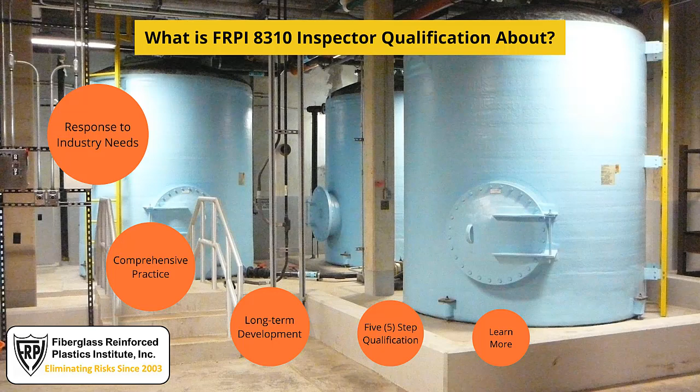Thank you for tuning in with us for What is FRPI 8310 Inspector Qualification about? The 60-second answer to this question is that the FRPI 8310 Inspector Qualification is a comprehensive practice for periodic documented fiberglass reinforced plastic, or FRP, tank inspection.

It was launched in October 2018 in response to industry needs centered around addressing laws and supporting an effective facility asset management program. This practice has undergone long-term development that drew on a balanced group of industry experts before launch and is administered by a nationally recognized and generally accepted industry organization.

It involves a well-documented, simple 5-step inspector qualification process. The process includes delivery of education by a competent third-party source, inspection procedures incorporating good engineering practices, and a means for recognizing a responsible level of FRP tank inspector expertise. There is a bit more to it than this, though. Our informative, revealing story follows.

Response to industry needs. Let's take a look at the industry needs emerging since 1990 that this inspector qualification program has been introduced to satisfy. These situations include evolving inspection laws, standard-setting precedents, FRP practice initiatives, special interest groups rallying, plus challenges and opportunities.

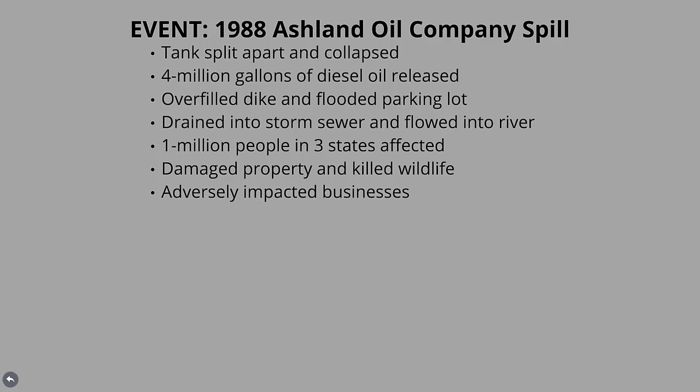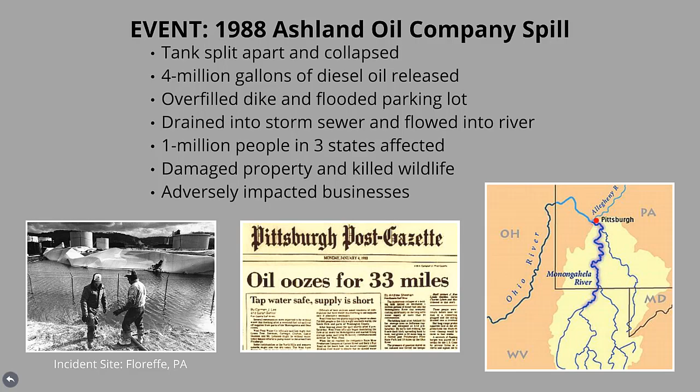In 1988, the Ashland Oil Company in Floreffe, Pennsylvania had a tank split apart and collapse, spilling 4 million gallons of diesel oil. The oil overfilled the tank containment dike, flooded the parking lot, drained into a storm sewer, and then flowed into a nearby river that carried the spill downstream for 33 miles.

In the 1990s, the EPA formed the Spill Prevention, Control, and Countermeasure, or SPCC, Task Force in response to the spill. This effort led to the regulation now known as 40 CFR Part 112, Oil Pollution Prevention. This Oil Pollution Act amended the Clean Water Act with final revision in 1994, requiring facility-specific discharge response plans.

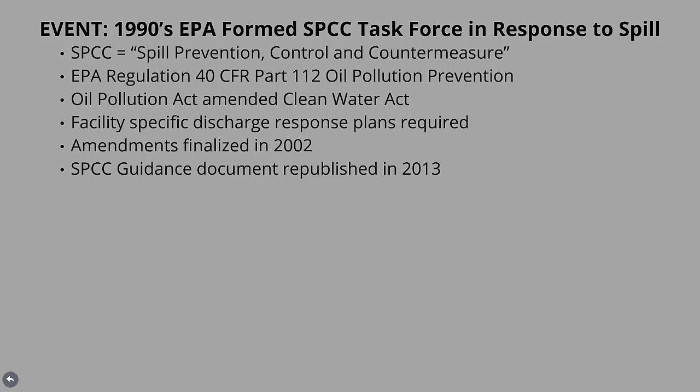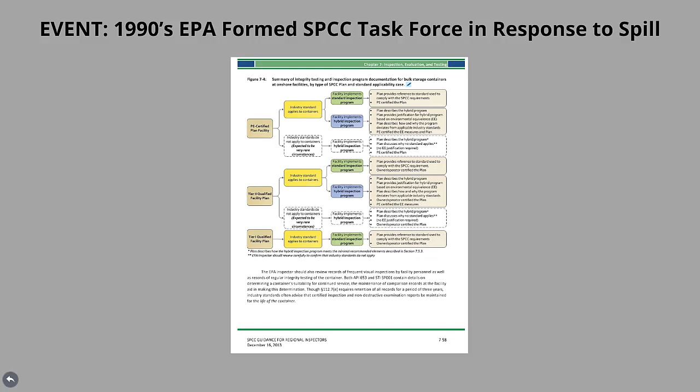Amendments to this regulation were finalized in 2002, and the SPCC guidance document was republished in 2013, where Chapter 7 covers inspection, evaluation, and testing. Chapter 7, Figure 7-4 of this guidance document, summarizes integrity testing and inspection program documentation required for bulk storage containers at onshore facilities. 3 facility plan classes are provided for a professional engineer certified plan facility, Tier 2 qualified plan facility, and a Tier 1 qualified plan facility.

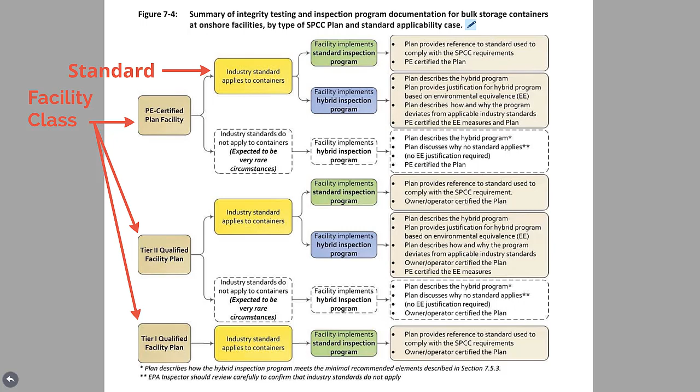All plans are required to be provided in accordance with an industry standard that applies to the containers. A written inspection and test plan on facility class is required to be implemented at these facilities. Each plan is to be certified by a licensed professional engineer or owner-operator, providing accountability via a qualified individual.

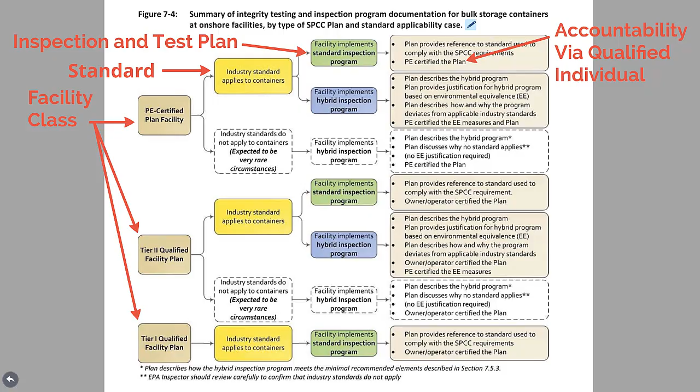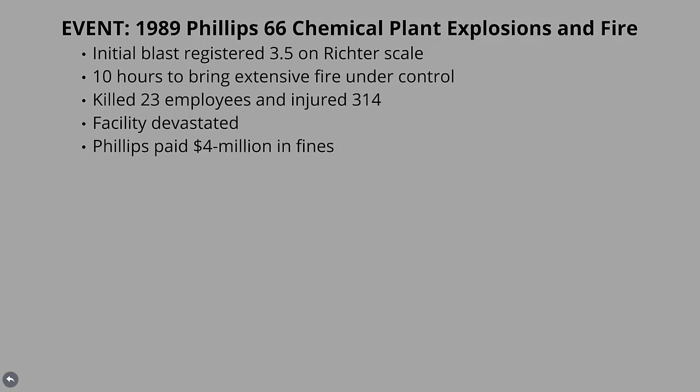In 1989, the Phillips 66 chemical plant in Houston, Texas, had a large explosion and fire. The initial blast registered 3.5 on the Richter scale. It took 10 hours to bring this extensive fire under control, killed 23 employees, and injured 314. The facility was devastated, and Phillips paid $4 million in fines.

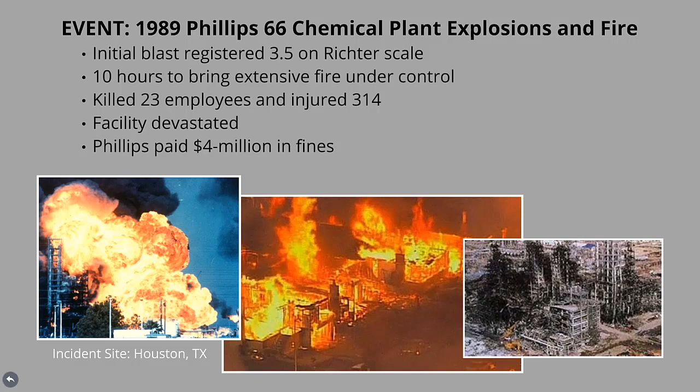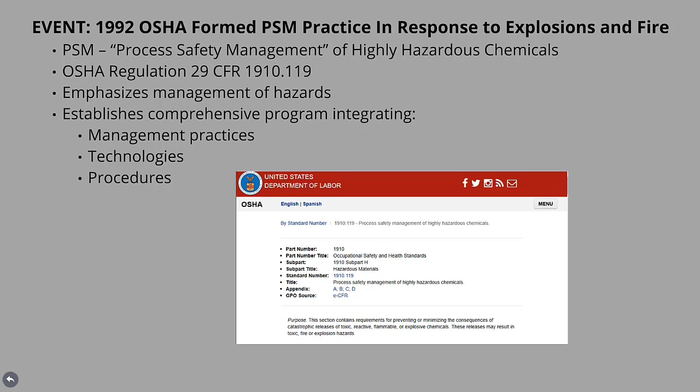In 1992, OSHA formed the Process Safety Management, or PSM practice, in response to the explosion and fire. This led to the regulation known now as 29 CFR 1910.119. This regulation emphasizes the management of hazards, plus establishes a requirement for comprehensive programs integrating management practices, technologies, and procedures.

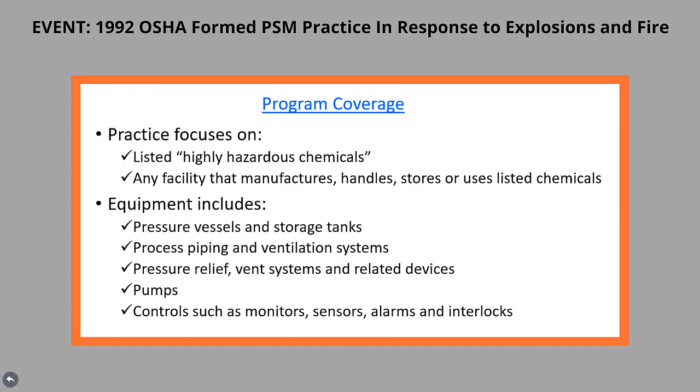Program coverage provides for a practice that pertains to facilities that manufacture, handle, store, and use listed highly hazardous chemicals. Process equipment covered in these facilities are pressure vessels, storage tanks, process piping, ventilation systems, pressure relief, vent systems, related devices, pumps, plus controls such as monitors, sensors, alarms, and interlocks.

There are 14 program elements that include employee participation, process safety information, process hazard analysis, operating procedures, training, contractors, pre-startup safety review, mechanical integrity, hot work permits, management of change, incident investigation, emergency planning and response, compliance audits, plus trade secrets.

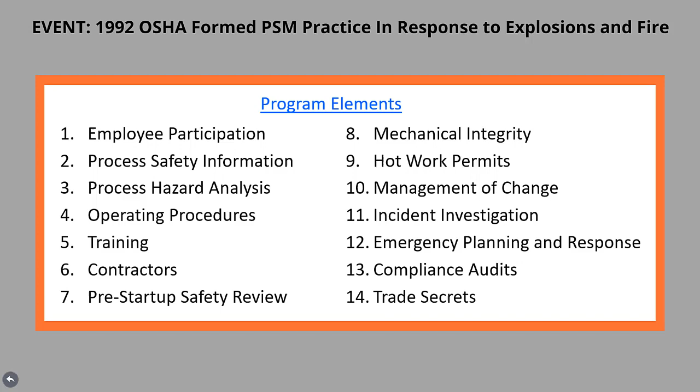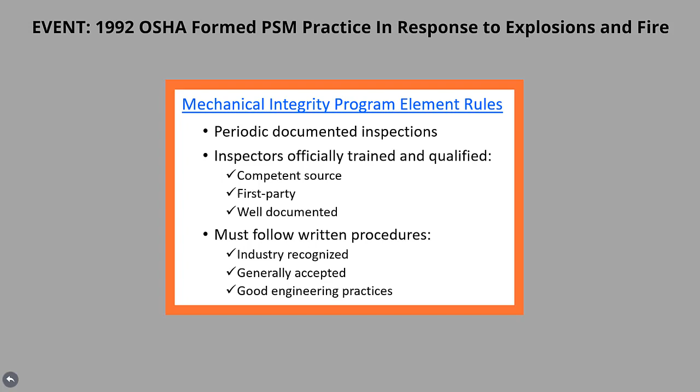The OSHA PSM Mechanical Integrity Program element rules require periodic documented inspections performed by inspectors officially trained and qualified by a competent first-party source, training and qualification conducted under well-documented practice, following written procedures incorporating good engineering practices, plus element rules administered by a recognized and generally accepted industry organization.

In 1999, the EPA Risk Management Program, or RMP rule, initial compliance deadline arrived. This brought about the regulation known now as 40 CFR 68. This regulation parallels the OSHA PSM practice. Several state regulations have also evolved from this RMP and other PSM rules.

General guidance provided under the RMP rules covers maintenance and mechanical integrity requirements, where these areas are characterized by written procedures, training, plus inspection and testing activities.

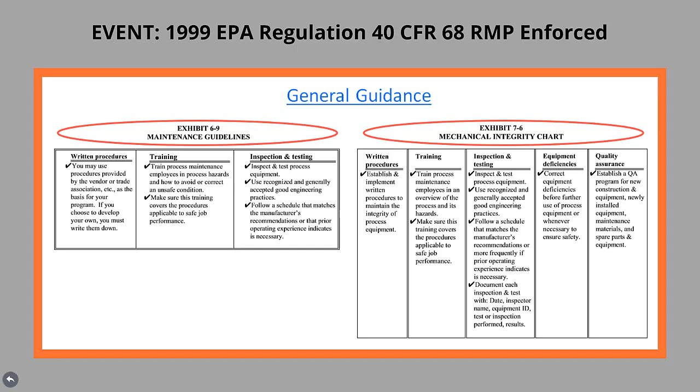Examples of state agency laws following on to the EPA and OSHA mandates include the State of Massachusetts Fire Marshal's Office Program 502 CMR 5.00, New York State Department of Environmental Conservation Title VI, Chapter 5, Subchapter E, Part 598, New Jersey Department of Environmental Protection Title VII, Chapter 1E, plus Pennsylvania Department of Environmental Protection Title 25, Chapter 245. These laws require daily, annual, and 5-year inspection intervals for tanks ranging in capacity from 185 to over 10,000 gallons.

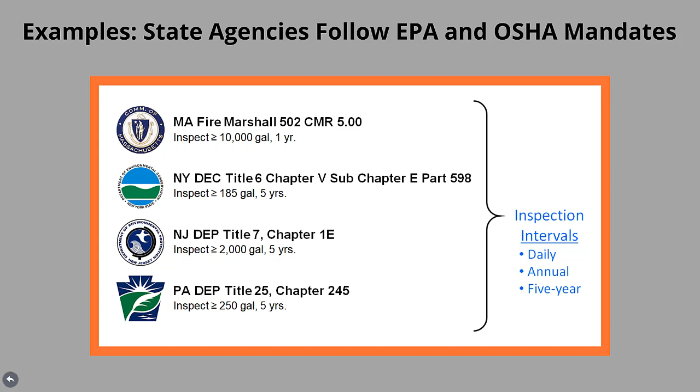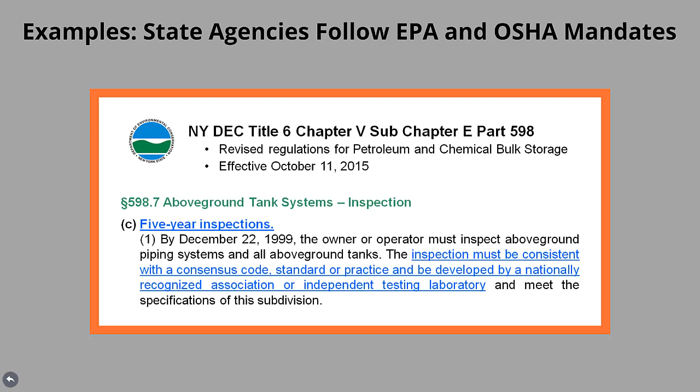Some states echo federal mandates for the scope of inspector qualifications. As an example, New York DEC Part 598.7, Paragraph C, governing 5-year above-ground tank system inspection intervals, goes on to state that the inspection must be consistent with a consensus code, standard, or practice, and be developed by a nationally recognized association or independent testing laboratory.

Standards setting precedents. In response to both federal and state laws evolving since the 1990s, tank owners have been required by law to prevent, prepare for, and respond to oil and chemical-related disasters. To accomplish this, these laws essentially say that regulated tanks shall be inspected by an officially trained, experienced, exam-qualified, and well-documented individual utilizing a written inspection and test plan procedure on a prescribed schedule following a good engineering practice, where each of these virtues are enabled through a standard practice facilitated by a nationally recognized and generally accepted industry organization.

Consequently, industry organizations needed to publish and support standard practices that produce reasonably educated and well-qualified inspectors in order to meet these laws. The American Petroleum Institute, API, was at the forefront of inspection standards development beginning in 1991, and was then followed by the Steel Tank Institute, STI, with their first inspection standard in 2000. Results in qualifying individual inspectors accelerated for steel tanks in the petroleum industry and beyond, with over an estimated 5,000 inspectors qualified now in the United States alone.

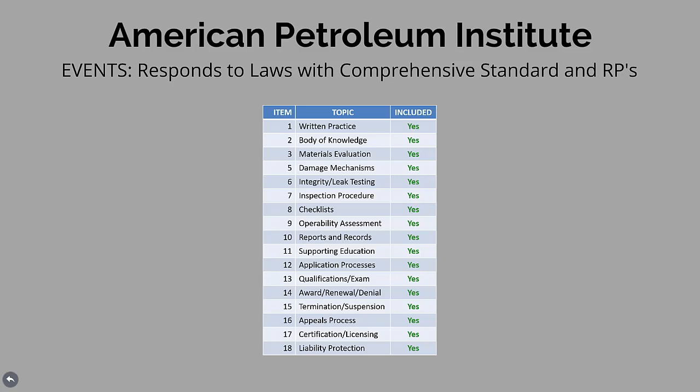Topics addressed to varying degrees provided for a written practice, body of knowledge, materials evaluation, damage mechanisms, integrity and leak testing, inspection procedures, checklists, operability assessment, reports and record keeping, supporting education, an application process, minimum qualifications and exam, award, renewal, and denial of credentials, termination and suspension, appeals process, certification and licensing, plus liability protection of various forms.

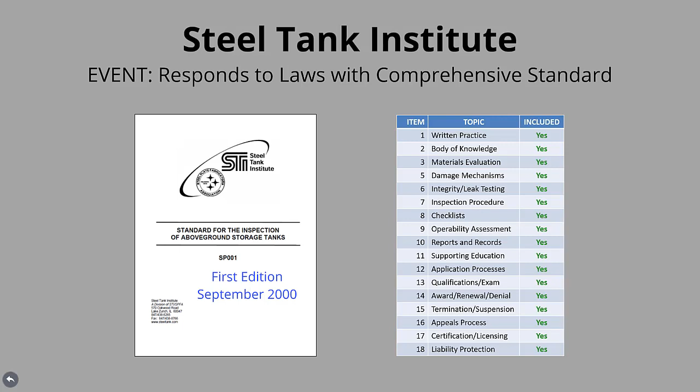STI responded to the laws with one standard, STI SP001, Standard for the Inspection of Above-Ground Storage Tanks, introduced in September 2000. It too is regarded by many as a comprehensive standard, similar to, but also expanding some on API inspection standards.

FRP practice initiatives. While FRP has earned great respect in a position as the material of choice for numerous chemical storage applications, it has been regarded by many as a mystery material, with very limited standards governing the education and qualification of FRP tank inspectors.

Given FRP's many layers of alternative reinforcements saturated with various thermoset resin and cure system options, a wide variety of composite materials have been laminated for tank components that are characterized by both isotropic and anisotropic properties. This complexity, coupled with laminating quality issues, has been problematic to a degree, resulting in a large tank price spread in the market and a remarkable variation of tank material performance for decades. Design variability, while an advantage of FRP, has also inhibited development of inspection standards.

Consequently, the FRP industry has historically made limited progress with developing full-fledged, robust, sustainable tank inspector education and qualification practices in response to the EPA, OSHA, and state regulations at law.

Niche industry organizations with well-intended professionals supporting the pulp and paper, petroleum, and chemical processing industries had made a noteworthy effort with an initial response to these rules at law from 1999 through 2012. However, general guidance documents published had shallow technical scope, plus varying content errors and conflicts.

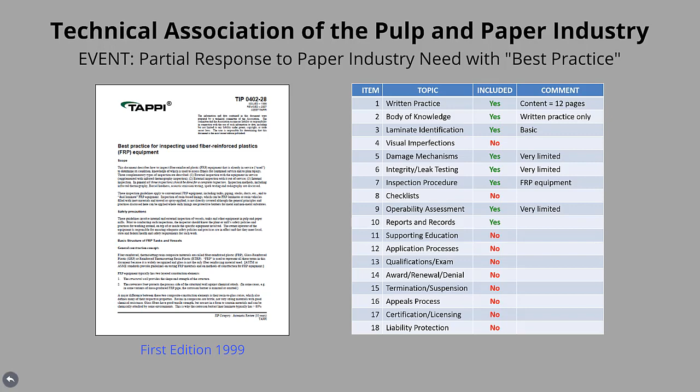With only 12 pages of content, it provides very limited general guidance and was not intended to address rules of law governing tank inspection or facilitate a means for education and qualification of tank inspectors, like API and STI standards.

The Fiberglass Tank and Pipe Institute, or FTPI, serving primarily the petroleum industry, introduced a publication in December 2007 referred to as FTPI 2007-1, Recommended Practice for In-Service Inspections of Above-Ground Atmospheric Fiberglass Reinforced Plastic Tanks and Vessels.

With 38 pages of content, it too had very limited information and did not facilitate a means for sustainable education and qualification of tank inspectors under EPA and OSHA regulations. This practice was developed under the direction of and owned by the FTPI Executive Director, who retired in 2017 following 24 years of service and retained intellectual property rights to the practice.

At the time of this Executive Director's retirement, the FTPI decided to no longer support this recommended practice, removed it from circulation, and has disowned association with it.

As the FTPI withdrew support for this practice, a third-party for-profit company, under its own initiative with good intentions, had acquired some intellectual property rights from the retired FTPI Executive Director and commercialized tank inspector certification with the now rebranded first edition of the initial December 2007 works.

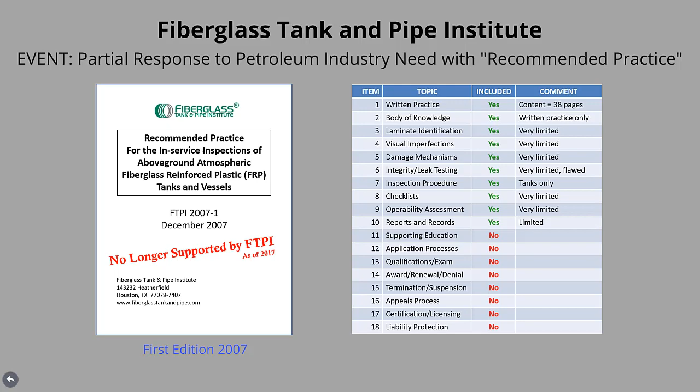Plus, this company, the retired executive director, and the FTPI have published a disclaimer for any liability associated with the former in this rebranded program.

The Materials Technology Institute, or MTI, serving primarily the chemical processing industry, introduced an inspection training program in 2012 as a means to provide education and certification of general FRP inspectors as opposed to tank inspectors. This included a course handout, 2.5 days of instruction by a few well-respected FRP industry experts who developed course content, and about an hour-long test.

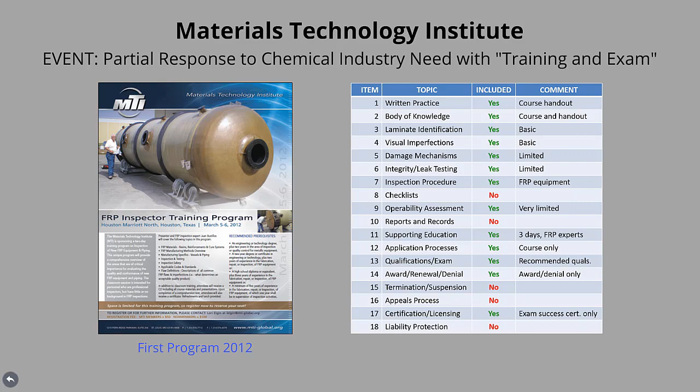This program was made available to anyone volunteering to have sufficient inspection experience, as benchmarked against course recommended prerequisites similar to API 653 education and experience requirements. No published sustainable industry standard practice has been made commercially available addressing EPA, OSHA, and state tank inspection regulations.

Special interest groups rallying. A coalition of special interest groups formed under the name Environmental Justice and Health Alliance for Chemical Policy Reform, the EJHA-CPR. A chief concern of theirs is for public health and safety, plus environmental protection as it relates to chemical spill disasters. In 2014, they published a position that evolved into a lawsuit against the EPA in 2015, and the EPA responded under a United States District Court order in 2018.

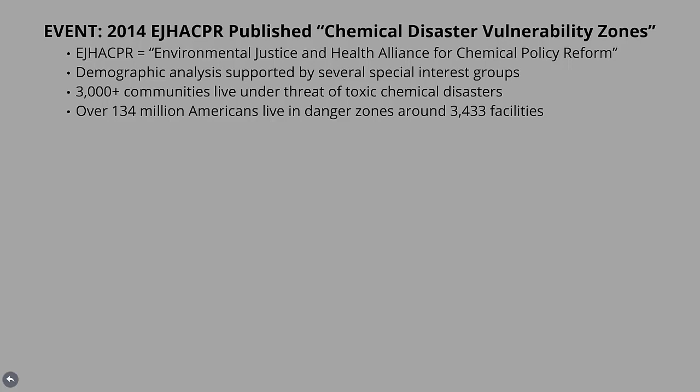In 2014, the EJHA-CPR published a demographic analysis identifying chemical disaster vulnerability zones in the United States. It was titled, "Who's in Danger?" This analysis was supported by several special interest groups.

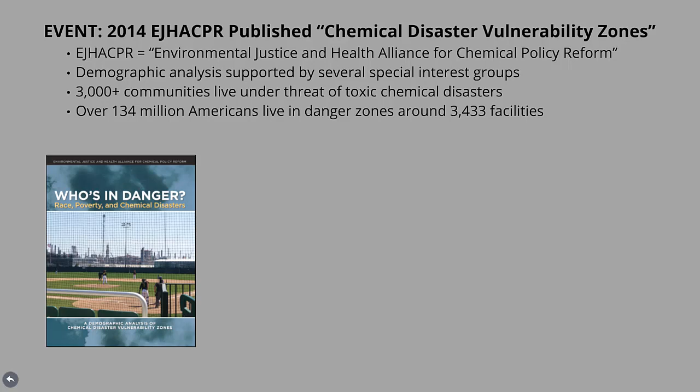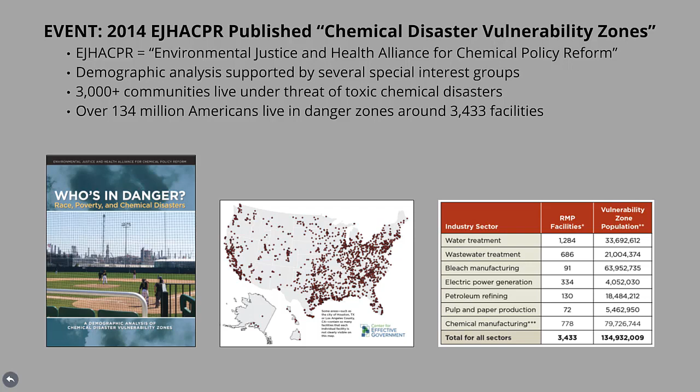Over 3,000 communities were identified as living under the threat of toxic chemical disasters, with over 134 million Americans living in danger zones around 3,433 facilities. Of these facilities, the water and wastewater treatment sector accounted for 57% of them.

It was reported that U.S. Coast Guard data shows 18,764 chemical spills between 2005 and 2014, where 1,294 cases of hazardous substances reached bodies of water, and 300,000 people's drinking water was poisoned by the Elk River, West Virginia spill.

The U.S. Chemical Safety Board also screened more than 250 high-consequence chemical incidents per year. These incidents included death, injury, evacuation, and serious environmental or property damage. This demographic analysis points to risks being real, and regulation or stricter enforcement of existing laws is needed.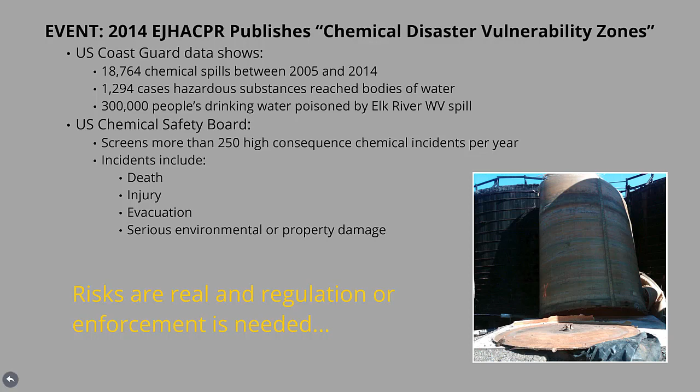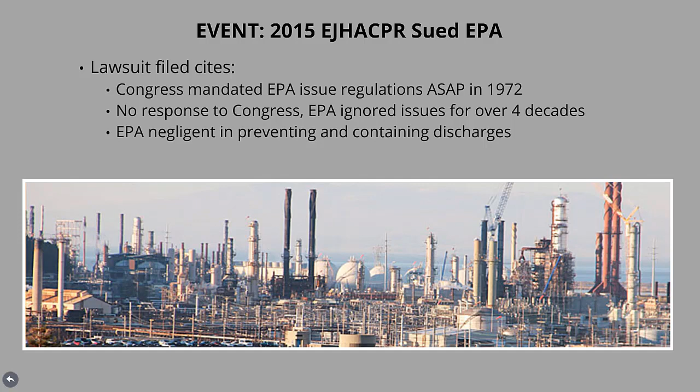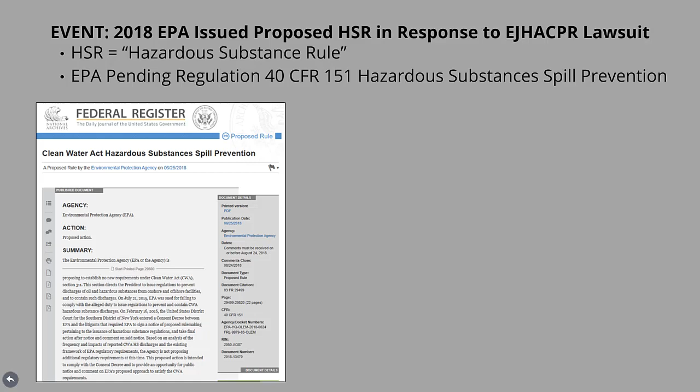In 2018, the EPA responded to the EJHA-CPR lawsuit by issuing a proposed hazardous substance ruling. This led to the regulation known now as 40 CFR 151, Hazardous Substances Spill Prevention. In preparing their response, the EPA conducted an incident study to justify the need for a new rule. The study reports that

285,867 releases were reported from 2007 to 2016. 9,416 releases impacted water in the EPA jurisdiction. 3,140 releases reached water. 2,491 releases were from non-transportation sources, and 117 releases resulted in evacuations, injuries, hospitalization or fatalities, plus waterway closures or supply contamination.

Upon completion of the EPA study, their proposed response to the lawsuit concluded that, based on EPA analysis and an existing framework of regulations, plus overall multiple statutory and regulatory requirements established under different federal authorities, the EPA is not proposing additional regulatory requirements at this time.

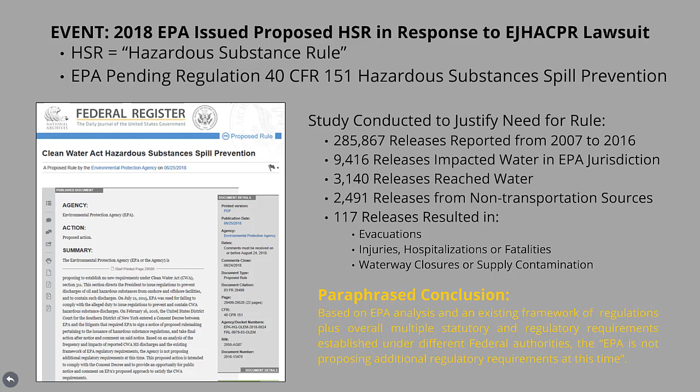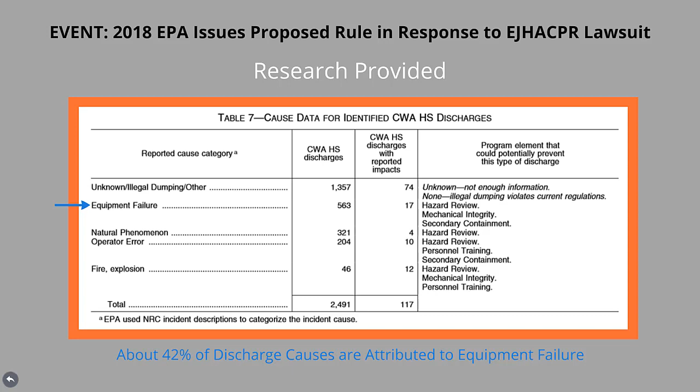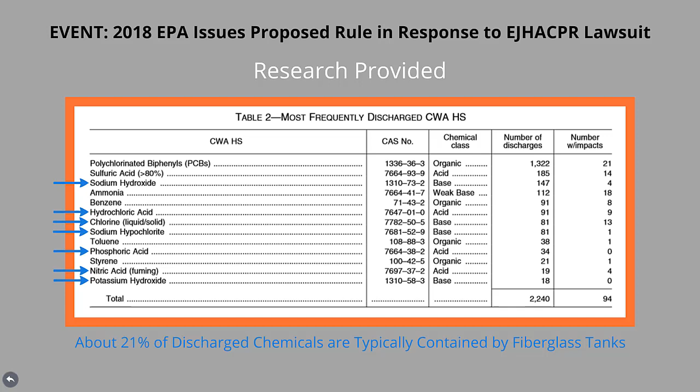Highlights of the EPA research show 563, or about 42% of discharge causes, are attributed to equipment failure. 21% of most frequently discharged hazardous substances are typically contained by fiberglass tanks. Plus, mechanical integrity and personnel training are reiterated as critical program elements in existing EPA and OSHA regulations aimed at public and environmental protection.

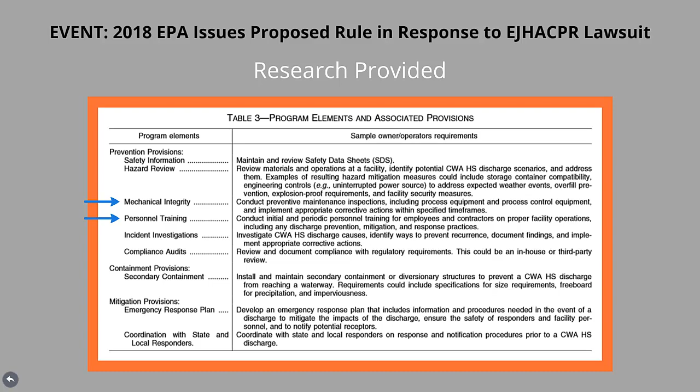Challenges and opportunities. There are a number of stakeholders with varying needs jockeying for position in the tank inspector arena as laws evolve and standards are established, creating a situation with a few challenges and many opportunities. Stakeholders facing these situations include owner end users, inspection and testing companies, manufacturers, agencies insuring against disasters, plus federal and state regulators.

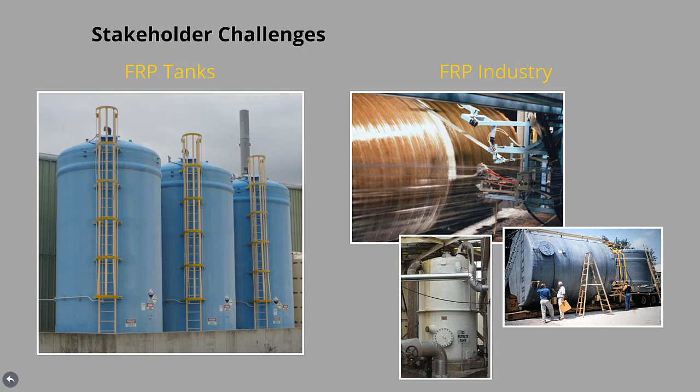Stakeholder challenges driving needs go even deeper than laws and standards. These added challenges stem from the nature of FRP tanks themselves, as presented earlier, combined with the state of the relatively young FRP industry now after 65 years since inception in the 1950s. Inspecting FRP tanks can be challenging due to the impact composite material complexity has on tank performance, and its resulting unpredictable nature of premature failure. To illustrate this challenge, let's take a look at a couple of asset management concepts.

The first concept is the potential failure to failure curve, where we look at equipment mortality curves with asset condition on the y-axis and time to failure on the x-axis. In theory, tanks start out new. Condition begins to deteriorate, then we see signs of potential failure if we look, which is labeled as point P. The tank eventually provides an inadequate level of service, and then it is deemed to have failed, which is labeled as point F. The time from point P to F is called the PF interval for predictive and condition-based maintenance.

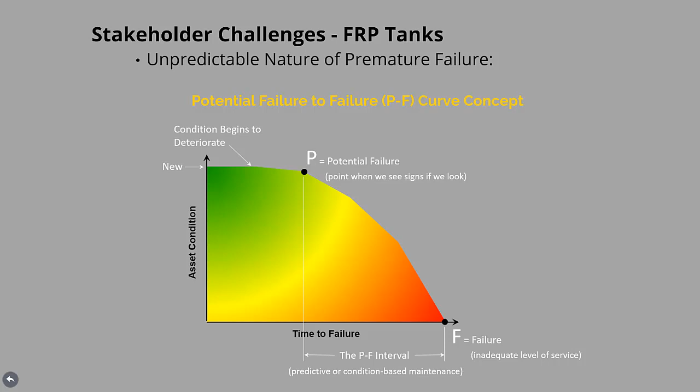Here's an example of applying this concept to FRP tanks in sodium hypochlorite service, where the tank on the left went 18 months to failure, the one in the middle 7 years to failure, and on the right 16 years to failure. As you can see, time to failure is not necessarily age-related for FRP tanks. So, this traditional time to failure concept may be a challenge for inadequately educated and qualified inspectors to apply for FRP tanks.

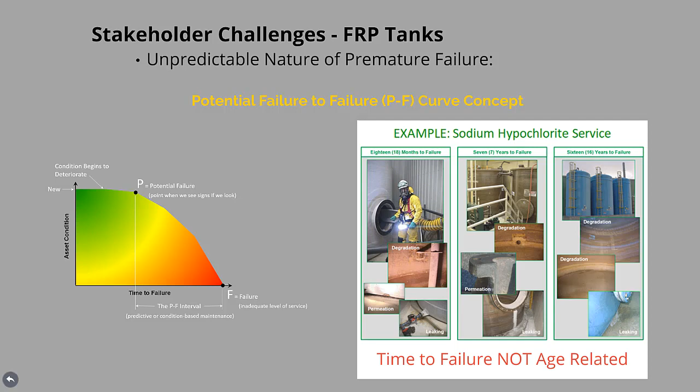The second concept is risk-based inspection, where we have likelihood of failure on the y-axis and consequences of failure on the x. Consequences being financial, health and safety, regulatory non-compliance, plus community perception. The red area is a high level of risk, yellow medium, and green low.

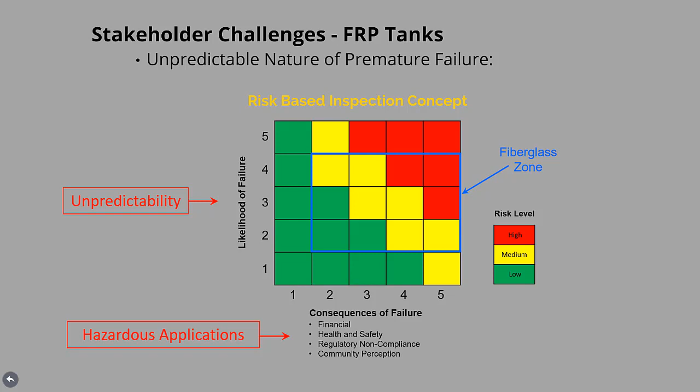An inventory of FRP tanks containing hazardous substances typically has a range of risk exposures that fall within the window shown here. However, due to the unpredictability of FRP tank failure and hazardous applications, this traditional inspection concept may be a challenge for inadequately educated and qualified inspectors to apply, resulting in high-risk situations being missed.

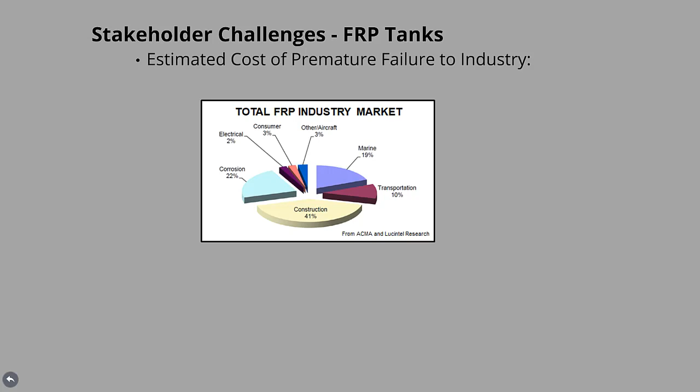Premature FRP tank failure is a noteworthy concern. The estimated cost to industry is high and underscores stakeholder challenges. In estimating the cost of premature failure to U.S. industry, we know that the corrosion sector covering all FRP chemical process equipment accounts for about 22% of the total FRP industry market. This data is based on pounds of resin shipped to manufacturers per ACMA and Lucintel research. This equates to approximately $5.1 billion in corrosion equipment purchased per year.

Over the past 30 years, it's projected that $3.86 billion average per year has been purchased, and today we have a $115.8 billion FRP installation base. Given the size of the installed FRP equipment market, it is estimated that premature failure amounts to $357 million per year, or 7% of sales. The above-ground storage tank segment is about 30% of this total, or $107 million in premature failure annually. This is remarkable and places a very high importance factor on the need for well-educated and qualified FRP tank inspectors.

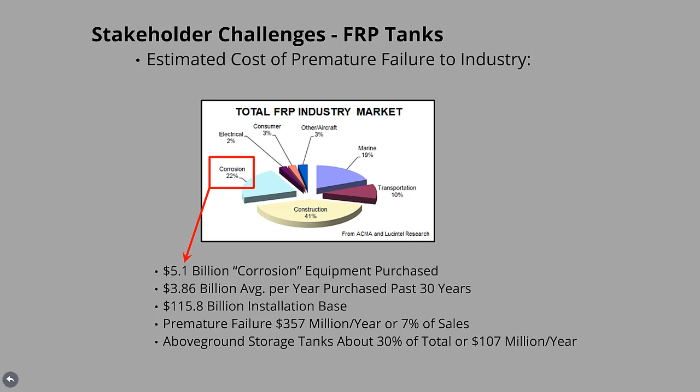The state of the FRP industry has been posing stakeholder challenges for decades. Without a comprehensive inspector education and qualification program, it has been impossible to comply with evolving EPA, OSHA, and state laws. Special interest groups have also been drawing attention to failure incidents and risk we face. Many stakeholders cannot easily and concisely identify or differentiate well-educated and qualified FRP tank inspectors, leaving themselves at risk in a difficult situation trying to determine who is unqualified, good, better, or best.

On the flip side of challenges are stakeholder opportunities. A new, comprehensive FRP inspector qualification practice has been needed that builds on the works of others, addresses inspection-related laws, establishes minimum inspector skill levels, and positions recognizably qualified inspectors for minding risk. An enhanced level of education that helps inspectors more accurately predict failure incidences and avoid hardship has also been needed.

Other valuable opportunities from a business perspective include a need for a practice that helps lower asset management costs and improve level of service, advance career building and company expertise, leverage competitive advantage, enable officially recognized industry leadership, plus save and/or make more money. Last but not least, a practice is needed to help prevent injuries, fatalities, and environmental damage.

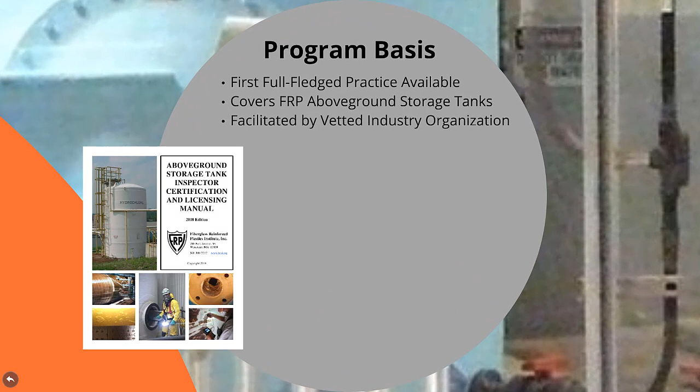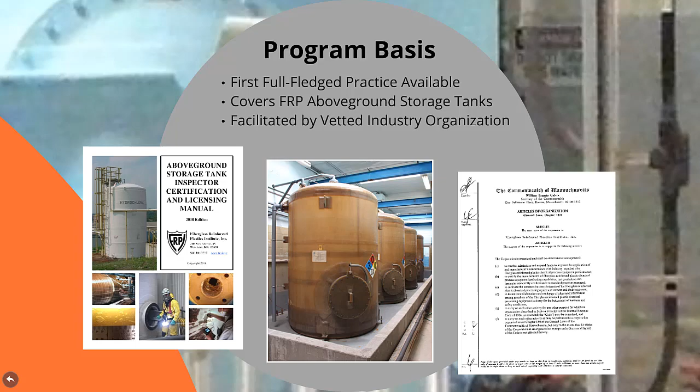The FRPI 8310 Inspector Education and Qualification Practice, introduced in October 2018, is a thorough response to industry needs presented here, where the practice includes methods to help overcome these challenges and capture opportunities. Here is an overview of this comprehensive practice, program basis, objectives, and general content. The FRPI 8310 Inspector Qualification Program is the first full-fledged practice available that covers FRP above-ground storage tanks. This program is facilitated by a vetted nonprofit industry organization incorporated as the Fiberglass Reinforced Plastics Institute, known as FRPI, with articles of organization first filed in the Commonwealth of Massachusetts in 2003.

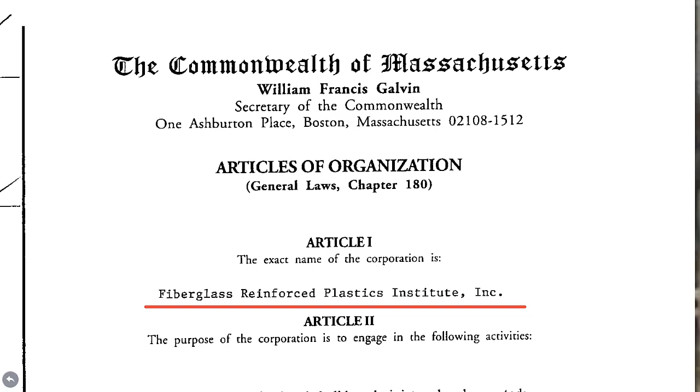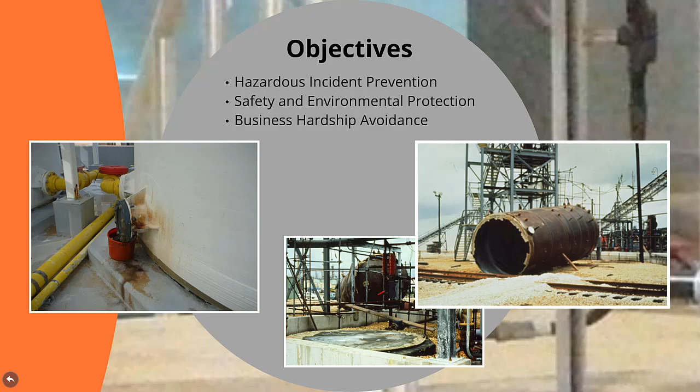This standard practice is aimed at hazardous incident prevention, from simple leaks to spills caused by events such as overpressurization disasters, safety and environmental protection, plus business hardship avoidance. This program is supported by a very comprehensive manual with 130 pages of color illustrated works. It includes methods for original materials benchmarking, damage mechanisms analysis, plus integrity and leak testing necessary to make reliable condition assessments and sound suitability for service determinations.

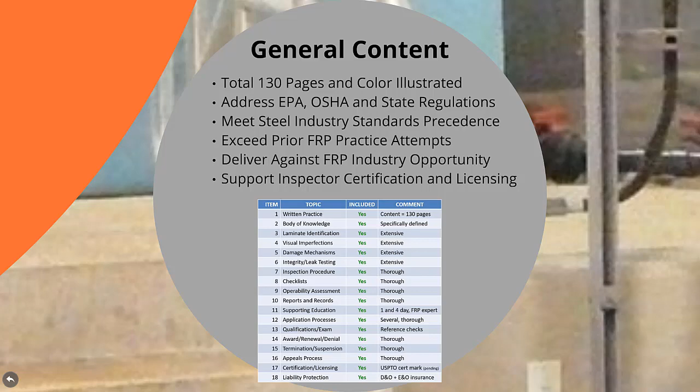The program is intended to address EPA, OSHA, and state regulations at law, meet or exceed tank inspection standards precedent set decades ago by the nearly century-and-a-half-old steel industry, substantially exceed prior FRP practice attempts, deliver against FRP industry opportunities, plus support sustainable education, certification, and licensing of FRP tank inspectors.

Long-term development. A tremendous amount of industry effort and funding has gone into the development of this FRPI 8310 Inspector Certification and Licensing Program.

Third-party accreditation of the program is in process, and the cost to become certified and sustain certification has been strategically determined. This inspector qualification practice has been in the making for over 30 years and involved more than 1,200 hours of development work in the 2 years prior to launch.

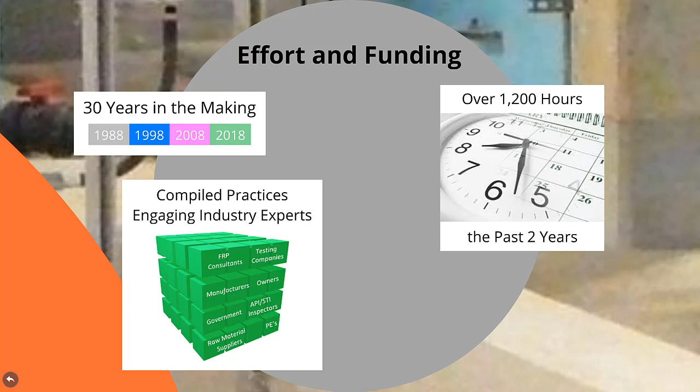The published works supporting the program are a compiled practice that engaged a balanced mix of industry experts in business categories including FRP consultants, testing companies, manufacturers, owners, government, API and STI inspectors, raw material suppliers, plus licensed professional engineers. The effort, materials, and facilities required to launch this program have been funded through the Fiberglass Reinforced Plastics Institute mission work, comprised of manufacturer and equipment certification, seminars, services, and membership.

The Registered Continuing Education Program, or RCEP, is a nationwide organization that has vetted and been recognizing FRPI since 2011 as a continuing education provider for licensed professional engineers practicing in the FRP field. The FRP 831 course supporting FRPI 8310 inspector credentialing provides 32 hours of professional development credit under this RCEP program.

FRPI has been recognized by the United States Patent and Trademark Office, or USPTO, since 2014 as a certification mark owner and certifying body for FRP equipment manufacturing, including tanks, plus odor and air pollution control equipment. These marks awarded to FRPI are founded on comprehensive certification programs written by FRPI that underwent substantial vetting by USPTO attorneys prior to award.

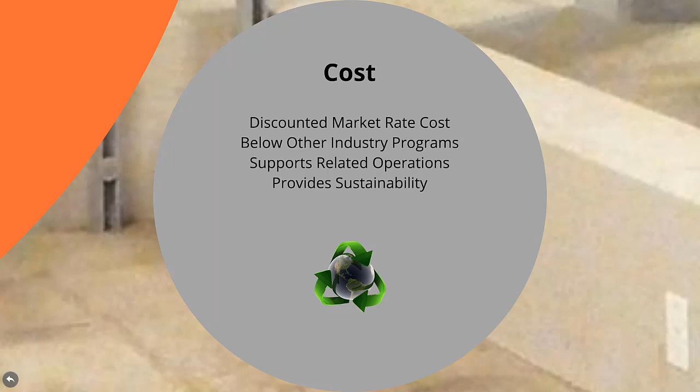A call for industry comment on this FRPI 8310 Inspector Certification Program has been publicly made since October 2018 and is echoed here. Industry and the general public are invited to contact FRPI and comment on the FRP Tank Inspector Certification process and inspection practices governed by SP 8310. All comments will be taken into consideration for future development and publication of this practice as a consensus standard. This inspector qualification program has been made available at a discounted market rate cost below other comparable industry programs, supports related operations at FRPI, and provides sustainability for the program over decades to come.

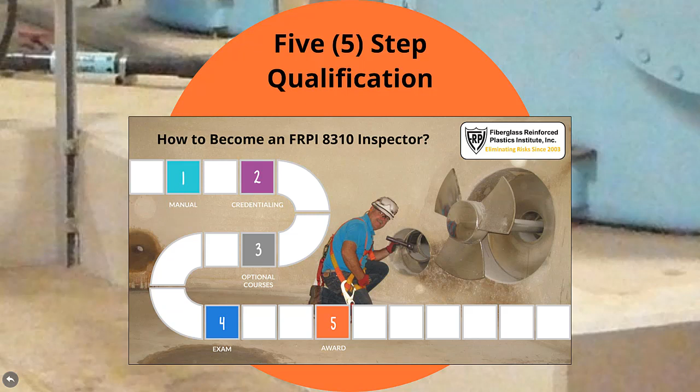5-step inspector qualification. It is easy and fairly quick for experienced FRP tank inspectors to become a certified and licensed FRPI 8310 inspector. Simply purchase and read the above-ground storage tank inspector certification and licensing manual detailing requirements. Go through a credentialing process to demonstrate minimum required personal and employment qualifications, participate in optional courses, pass a written exam, and then receive the inspector certification award. A thorough overview of each step, plus the color-illustrated manual with over 100 laminate, visual imperfection, and damage mechanism photos, is provided on a YouTube feature titled How to Become an FRPI 8310 Inspector.

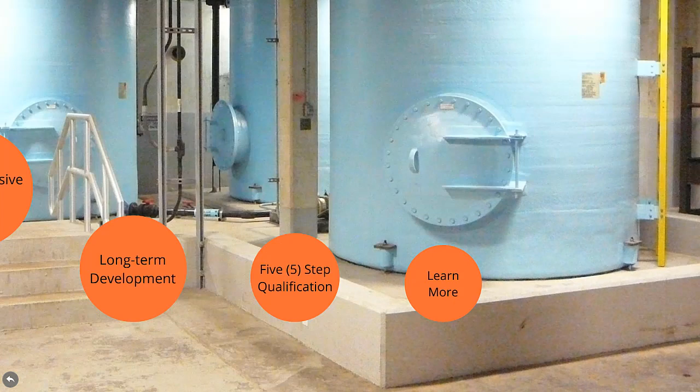There you have it. That's what FRPI 8310 Inspector Qualification is about.